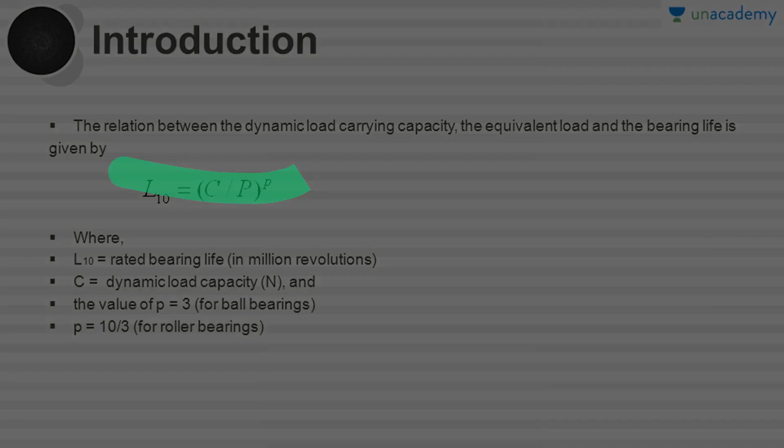Next, on rearranging the equation and solving for C, the dynamic load carrying capacity of the ball bearing, we get C equals P into L10 to the power of 1/p. We know that the value of p for all types of ball bearings is 3, so on substituting we get C equals P into L10 to the power of 1/3, and for all roller bearings p equals 10/3, and on substituting this value we get C equals P into L10 to the power of 0.3.

The relation between the life in million revolutions and the life in working hours is given by L10 equals 60 n L10h divided by 10 to the power of 6. In most applications or example problems we will get the value of the life in working hours only. So the relation between the life of the bearing in million revolutions and the working hours will be given here.

L10 is the life of the bearing in million revolutions, and L10h is the life of the bearing in working hours. So if they give the life of the bearing in working hours, we can convert this value into million revolutions with the help of this relation, L10 equals 60 n L10h divided by 10 to the power of 6, where L10h is the rated bearing life in hours and n is the speed of rotation of the bearing.

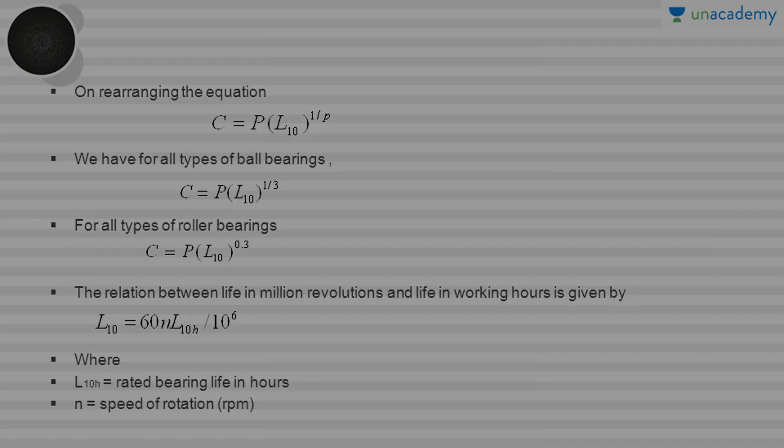So these relations are very important in calculating the dynamic load, the equivalent load and the bearing life of rolling contact bearings, and also the life of the bearing in working hours and in million revolutions. So with the help of an example problem we are going to apply these relations that I have defined here. So here we have the example problem.

In a particular application, the radial load acting on the bearing is 5 kilonewtons and the expected life for 90% of the bearings is 8000 hours. So see here, 90% of the bearings will experience 8000 hours, right? This is the definition of the rating life of ball bearings, where 90% of the ball bearings in that group will have the life. Here the life is 8000 hours.

This will be rated life, and we have to calculate the dynamic load carrying capacity C of the bearing when the shaft rotates at 1450 rpm. This is 1450, okay? So given in the problem we have Fr, the radial load acting on the bearing, 5 kilonewtons, and L10H. Here the life of the bearings is in hours, that's why we have the value of L as L10H, where L10H is the life of the bearing in hours and it is equal to 8000 hours here.

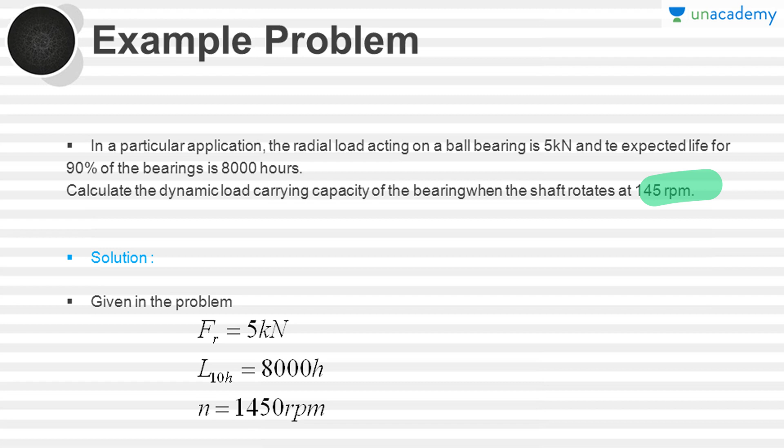So we have the value of N, the rotations of the shaft, given in rotations per minute. For bearing life of the ball bearing, we have the relation between L10 and L10H, which is given by L10 equals 60 into N into L10H by 10 to the power of 6, where L10H is the life of the ball bearing in hours and L10 is the life of the bearing in million revolutions, right? So on substituting the values given in the problem we get L10 equals 60 into 1450 into 8000 by 10 to the power of 6.

That will give us the value of the bearing life L10 as 696 million revolutions. This is a very heavy value for this ball bearing, and it is 696 million revolutions. Okay, and next we have to calculate the dynamic load carrying capacity with the help of the value of L10, which is the bearing life of the rolling contact bearings in million revolutions.

Okay, so in the relation between C, P and L10, we have the value of L, the life of the bearing in million revolutions, right? That's why we have found the value of L10 from this relation, where we have used the value of L10H. So if we get the value of L, the life of the bearing in working hours, we have to convert it into the life of the bearing in million revolutions. Then we can use the bearing life in this equation for the calculation of the dynamic load capacity of the ball bearing.

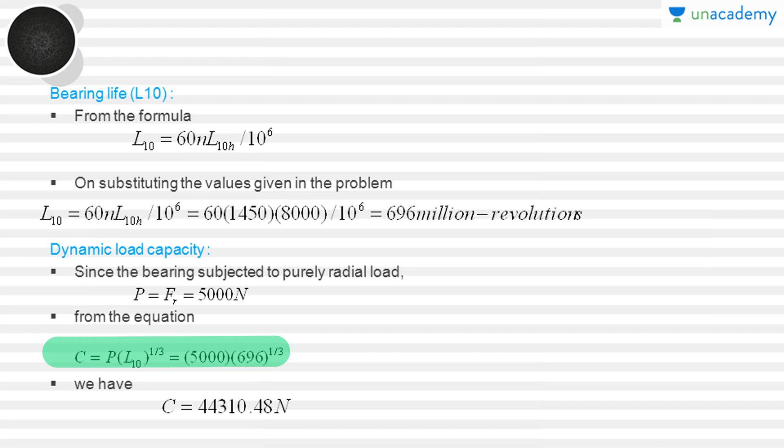With the help of that only we have got the value of C with the relation between C, P and L10. Okay, so we can't find the value of C with the help of the value L10H. That's why we have converted it into L10, which has the units million revolutions. So from this discussion we have found that the dynamic load carrying capacity C is 44,310.48 newtons. Thank you.